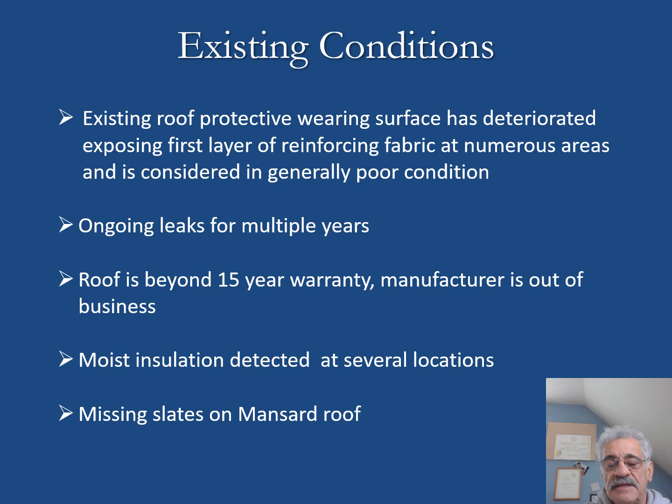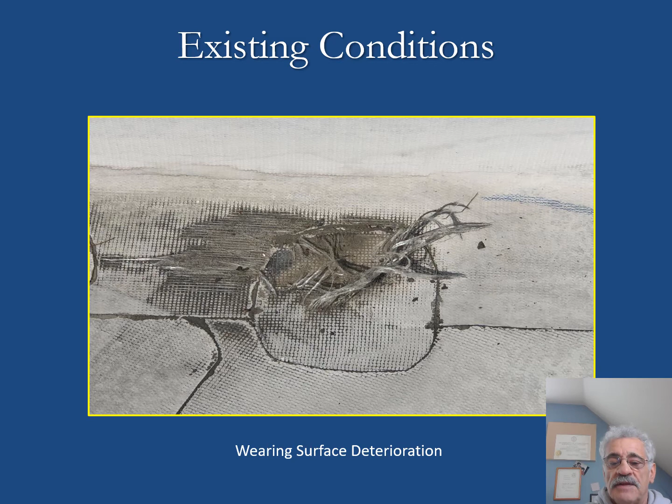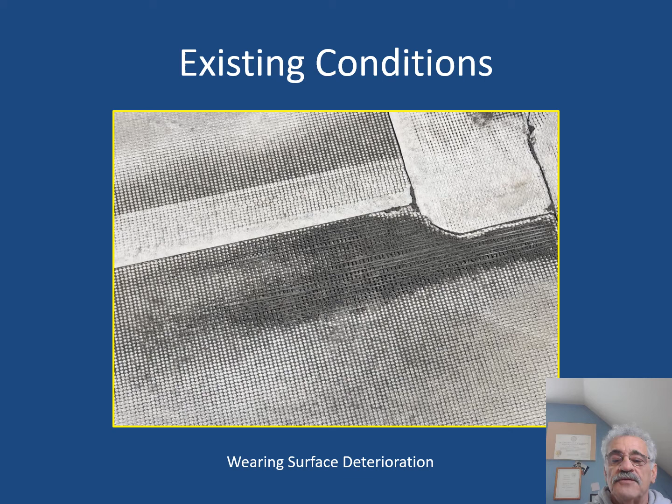In testing the roof, we found moist insulation in several areas indicating active leaking, and then there's missing slates that were observed on the mansard roof. This is just an illustration of the wear on the roof surface that I was referring to. Again, another illustration, you see the hashed fabric coming through. You're not really supposed to see that. It's supposed to be like a solid surface.

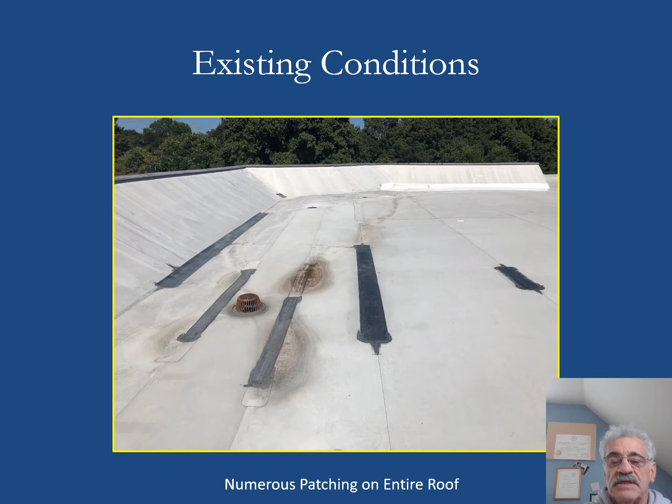Evidence of patching. Generally leaks occur at the seam, so that's why you're seeing these long strips of patches to address those conditions. And finally, a piece of the missing slate on the mansard roof. It's probably 50 or 60 locations.

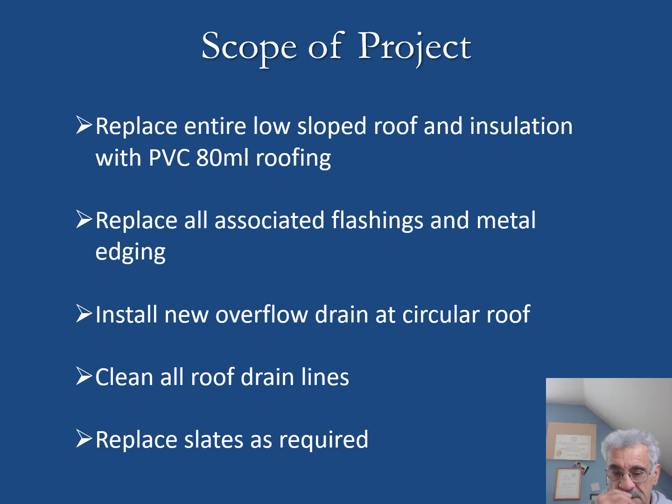The scope of the project: we're going to replace the entire low slope roof and insulation with a PVC 80 mil roofing, and I'll get to that later, why we chose that heavy duty roof. We're going to replace all the associated flashings and metal edgings with that low slope roof. There's going to be a new overflow drain installed at the circular roof, which is currently over the story time room of the library. That's a new code requirement. And we're going to clean all the roof drains and replace the missing slates as required.

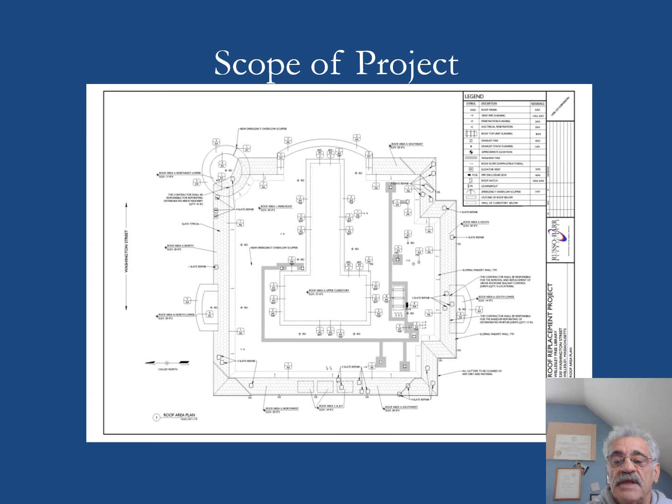And this is just a typical drawing showing the level of detail and the amount of details that were done in order to provide accurate bidding documents. Sustainability provisions: the new roof is to be solar ready, and by that I mean we're using high density cover board right below the roofing material in order to take the weight of the photovoltaics.

And the 80 mil PVC roof is a heavy duty roof, which has a longer lifespan, which is more in alignment with the life of solar panels, so that when it's time to replace the roof, we're changing everything up there and not trying to shift things around and pile them and change part of the roof and put them back. It's just a much simpler, cleaner way to pay for the project, and a very small incremental cost. It's only material; the labor is the same.